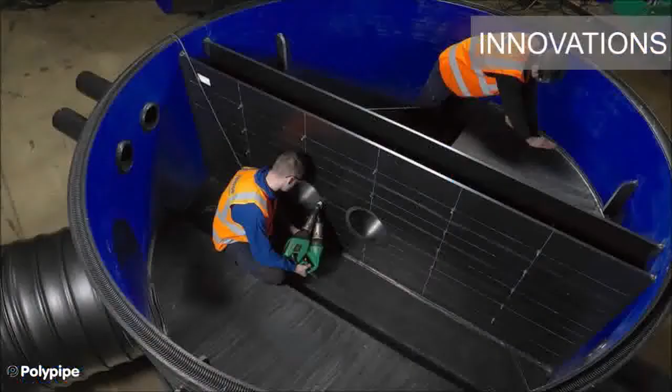Throughout our history, we've been at the forefront of innovating surface water drainage. As you all know, to meet SuDS regulations, highway drainage systems are often designed to attenuate and restrict the discharge rate using flow controls and oversized pipe networks. Our Ridgistorm XL pipe and chambers are plug and play, saving time and money, and up to 94% lighter than traditional materials and 30% faster to install.

As you can see on this 3-meter diameter chamber, you can imagine how hard this would have been to construct using traditional materials. The head wall would have required shuttering and formwork, and the channeling would have required wet trays and people working in confined spaces.

By fabricating off-site in a clean and dry environment, these units turn up fully fitted with steps and flow controls ready to be dropped into the ground. This means a much better quality of the final product and huge health and safety benefits. Now with full HAPAS BBA approval, we can assist with departures from standards and AIPs on systems over 900 millimeters.

At the beginning of the year, we changed our name to include Green Urbanisation. Later in this presentation, Charlotte further demonstrates how important this redefining name change is for our greener future. In simple terms, there's no green without blue. As a market leader, we can make a huge difference by including smart, sustainable ecosystems on our highway designs, setting the bar on green urbanisation, creating a legacy for our projects and its end users.

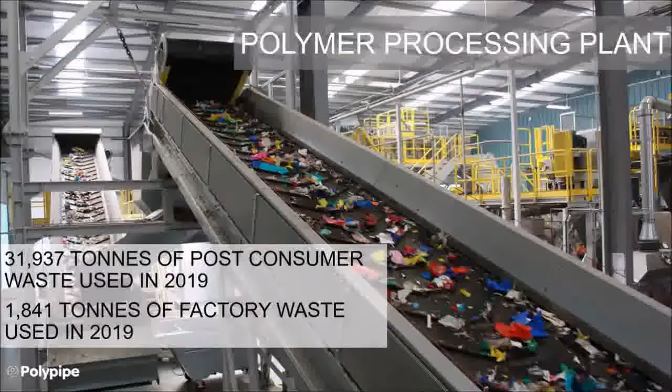As a business, we've also invested millions on our in-house state-of-the-art polymer processing plant, turning plastic bottles into engineered pipe. Nearly 100% of the product range we supply into the highway sector is made from recycled material.

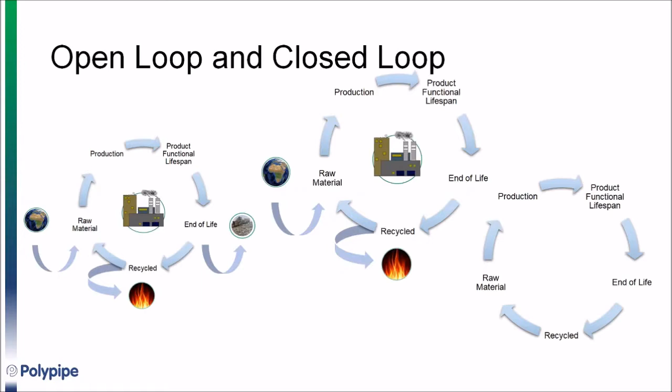At Polypipe, we have exactly this situation. We are taking packaging materials in the form of plastic bottles that arguably have an average functional lifespan of a year, and we are recycling them and then putting them into a product such as Ridgidrain that has a minimum of 50 years of functional life. This is quite a contrast, and if you look at the potential total functional life, you may yield a total lifespan of 3 years for a plastic bottle in a closed loop system before the material is completely degraded and has to be disposed of or goes on to contaminate purer forms of material. Alternatively, you can get a minimum of 150 years in a plastic pipe within an open loop process.

So how are we using post-consumer plastics in our products? James briefly mentioned the Polypipe Civils polymer processing plant, which is located at our production facility in Lincolnshire. At this facility, we are taking post-consumer polyethylene bottles along with a host of other unwanted material mixed in. We separate the different materials before sending the unrequired materials for further reprocessing and taking the polyethylene onwards through a multi-stage process that culminates in a material that is then used in the manufacture of various products within our portfolio.

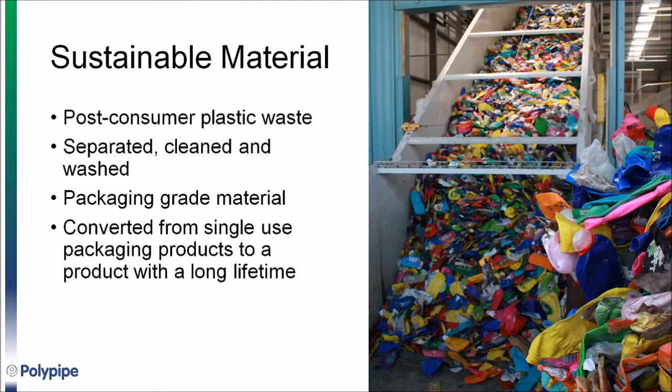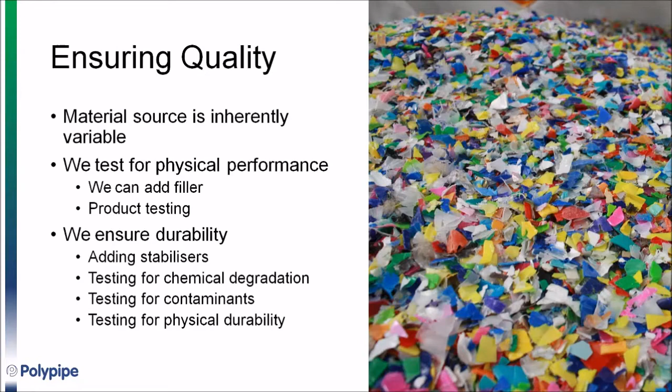One of the big challenges in using post-consumer polyethylene bottles is ensuring the quality of supply is good enough to meet the performance requirements of the products it's used in. The very nature of how many different grades of polyethylene are in existence and the methods used to collect post-consumer waste results in a variability in the raw material that can impact the product's performance. We are therefore careful in identifying reliable sources of post-consumer waste through our purchasing team, but we have also invested significantly in sophisticated material testing equipment that allows us to continuously monitor the material properties and ensure that the material's durability over its functional lifetime is going to meet our specification.

The sustainable journey from post-consumer waste to material finally ends in a variety of different products, with some shown here. Polypipe is always looking to increase its impact on sustainability without compromising product quality and performance, and as such there are products within our range that are made from material other than that derived from our polymer reprocessing plant, but are either purchased recycled materials to our exacting standards or are virgin materials that can be recycled. The reasons behind this are nearly always performance related, as we will always ensure the material used is suitable for the end product's intended use. However, we are always looking to innovate and find different ways of incorporating recycled material into our product ranges and make them even more sustainable.

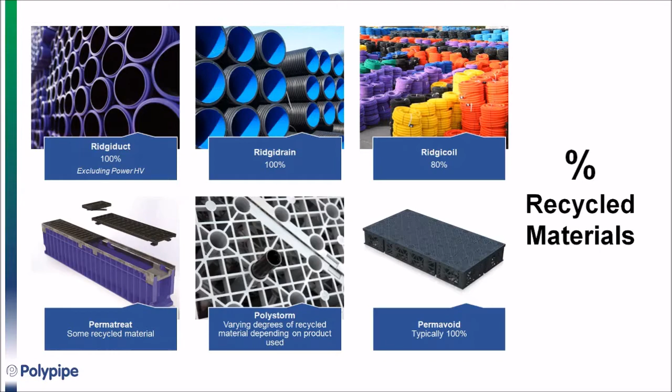So now I'm going to hand over to my colleague Charlotte Markey, who is our Green Urbanisation Innovation Manager. Thank you, Stuart, for that overview of our sustainability credentials at Polypipe.

And now I'll give you a roadmap to a greener future and how we can be strategically aligned with the environmental, biodiversity and efficiency objectives of Highways England. How can we help Highways England align with its performance goals and make these visions a reality? Well, there's some really interesting aspects of these 6 pillars here. We've got the themes of resilience, reliability, better environmental outcomes, the inclusive needs of all users and efficient delivery. And Polypipe can help with all these aspects, including safety for all. A well-maintained resilient network means that we need to mitigate against the damage caused by flood risk.

Better environmental outcomes mean we need tree planting solutions and constructed wetland solutions that will deliver better environmental outcomes for the long term, not just in the interim. When we talk about safety, Polypipe have an excellent track record of quality product. And meeting the needs of all users means that we don't need to just get people from A to B. They need to have a psychological and health and well-being benefit when they travel on the network.

And efficient delivery means working with partners in the supply chain, such as ourselves, who have, again, a very good track record of getting product to site when it's required and working at scale.

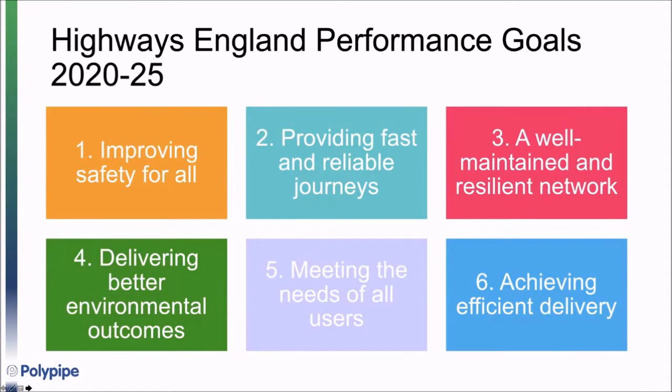So what is green urbanisation, and how can we incorporate green and blue infrastructure for our highways and linear assets? Well, it's about combined volumetric and green asset resilience. And by this I mean we incorporate green infrastructure into the water management framework, which enables us to collect, separate, clean, and importantly, reuse, attenuate and release water when we want to in a smart way with added smart technologies.

And we're not just dealing with volumes of stormwater with Polypipe solutions, we're using unique passive irrigation technologies within our Permavoid and Polystorm solutions to enable us to passively irrigate our green infrastructure so that we can reduce the amount of potable water that's being used, which really gives us a circular economy approach and a resource efficient approach to our schemes.

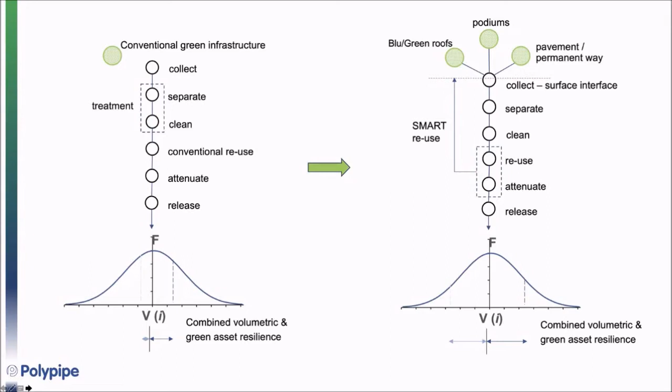It's a new generation of technologies to optimise urban green assets through an extended and fully integrated sustainable water management network, which means that working with highways teams across the country, we can add climate change resilience, we can help achieve those biodiversity net gain goals that we know Highways England have, and of course are mandated within the government's 25-year environment plan. We can also incorporate carbon offset as well and show the efficiency of some of our recycled plastic materials over other solutions such as concrete.

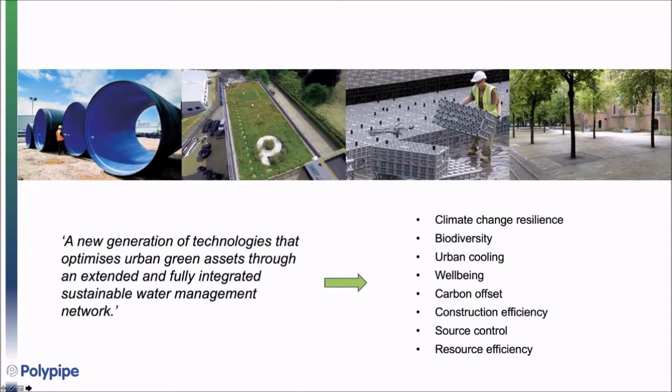We can also ensure that we use source control SUDS, which is much cheaper and more efficient and more environmentally beneficial than just relying on expensive end of pipe solutions or deep attenuation alone. We can passively irrigate a number of different projects at different scales, and we can hydraulically model what our green infrastructure interventions will provide and the co-benefits that can be derived.

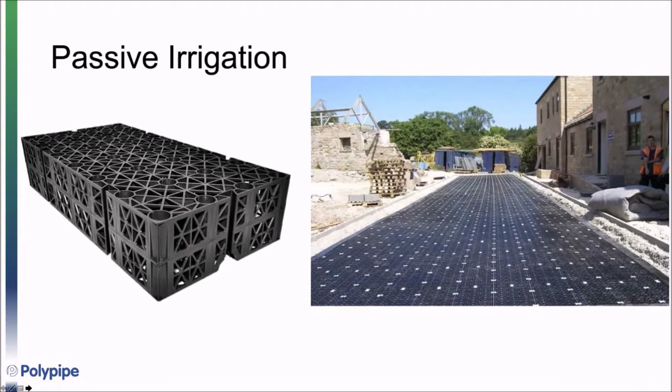And this image just shows our unique Permavoid system, which started life as a sub-base replacement, but we've engaged in so much research and development and innovation. We use this for tree planting, optimised SUDS, and much more. Tree planting is at the core of our green urbanisation agenda. If we look at the HS2 project, for example, 7 million trees are being planted on this huge national infrastructure project.

This image here shows you how we can use our Permavoid system to both passively irrigate the tree, or indeed we could just have the top layer of Permavoid, as you can see, beneath the paved surface, which enables us to ensure that the tree will establish long-term by avoiding soil compaction, providing the right soil volume for the tree, and ensuring that aeration, irrigation and nutrition are delivered to the tree pit below the ground.

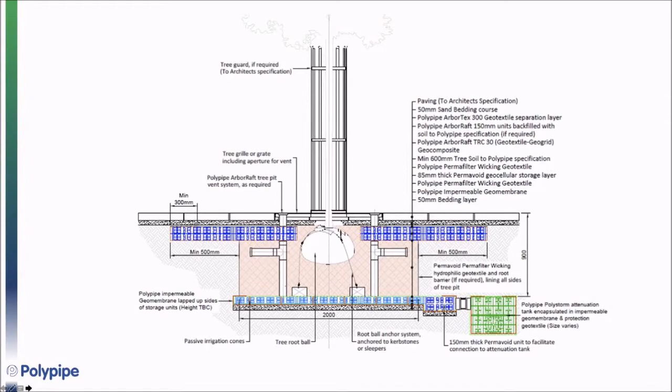And of course, this doesn't just stop at discrete interventions. SUDS are connected. So with our new smart technologies, we can get our SUDS systems to talk to each other, if you will, to pass water between SUDS components and to use smart cloud-based data to link live meteorological data to how we monitor the water levels within our systems.

Urban roads and cycle paths are a huge part of how we can embed resilience also, and it can provide, using Permavoid, water treatment, protection of assets such as existing and new trees, protection of hard landscape surfaces, longevity, again using passive irrigation. And because our Permavoid is a proven solid structural subbase, it's a very popular choice for cycle superhighways and networks that cover more active travel along our linear assets. This enables us to incorporate placemaking and amenity.

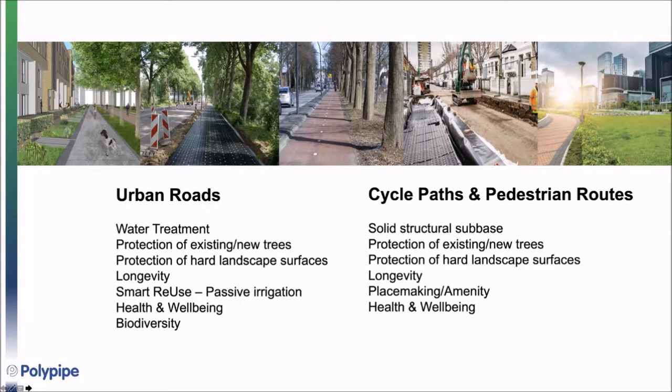So thinking about the 4 pillars of SuDS that we see in the CIRIA guide, we're not just dealing with water quantity, we can also incorporate our many treatment options to enhance water quality. And then we've got those pillars of amenity and biodiversity being incorporated within our new green urbanisation product offering.

And a final case study just to show the ability of our units to work along linear assets. This is a scheme that we did in Hammersmith and Fulham, one of the boroughs of London most at risk of surface water flooding. And we work with utilities companies and stakeholders and engage in a lot of research and innovation to show the benefits of using integrated green infrastructure with engineered solutions such as Permavoid to remove water from the combined sewer network.

And indeed, if we think about the water management hierarchy, source control is at the top of the chain, and actually discharge into combined sewers, if we look at Sewers for Adoption, is at the bottom. It's the last point of attack, really. We want to be managing more water at source.

And indeed, Thames Water were delighted with the results from our Permavoid retrofit project, because not only could we keep water out of the network, we could model the catchment of each tree pit, how much water we could take. And it also enabled us to work with communities and engage stakeholders.

Oftentimes we look at water and water management, but we don't see it as a visible asset. It's often being dealt with too far down and not close enough to surface, which is one of the philosophies of green urbanisation. Keep it close to surface and provide people with a green, visible asset. And I will hand over to John Moss now to talk to you about how Polypipe have evolved to meet the challenges of climate change.

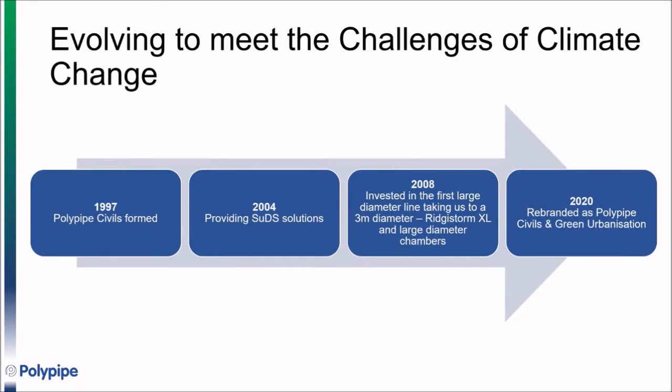Brilliant. Thank you, John, and 3 great presentations. It's great to see how our business has evolved over the years to meet the challenges of climate change, and a very inspiring message from Charlotte on green urbanisation. I hope this presentation has shown that we're more than just a pipe manufacturer, and by working collaboratively with Polypipe Civils and green urbanisation, we can achieve the 6 performance goals set by Highways England together over the next 5 years.